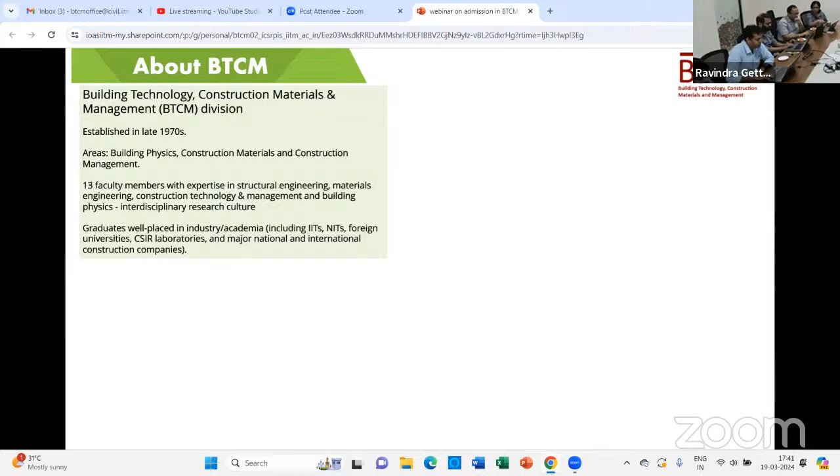At the moment, we have 13 faculty members in this group, and we all have diverse expertise corresponding to these areas. We've had several people graduate from the BTCM group across the years, and most of them are very well placed in industry and academia, both in India and abroad, many in the absolute best organizations, corporate or academic, in these fields.

So very quickly, we have, as I said, 13 faculty in the group, and this is a quick snapshot of the faculty as well as the areas that we work in. I'll start on the top right and quickly work our way down.

Professor Manu Santhanam and Professor Piyush Chaunsali work in the area of alternative cementitious materials. Professor Radhakrishna Pillai works in the area of corrosion control and service life extension. Professor Koshi Varghese works on lean construction. Professor Benny Raphael works on construction automation and robotics.

Ashwin Mahalingam, that's me, I work on building information modeling and integrated project delivery. Professor Murali Jagannathan works in the area of contracts. Professor Sivakumar Palaniappan works in the area of sustainable construction. Professor Nikhil Bugalia works in the area of digital technology simulation for sustainability. Professor Ravindra Gettu works in the area of life cycle assessment.

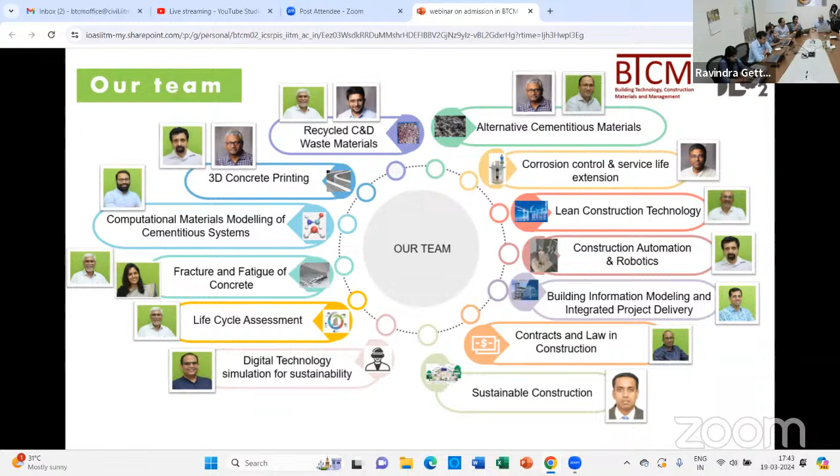So you can see we have a series of faculty who work in various areas relating to construction management, automation, process improvement, on construction materials, whether it's recycling, alternative cementitious materials, 3D printing, as well as in the area of building automation, construction automation.

In the BTCM group at IIT Madras, we have a dual degree program for our undergraduates who wish to stay an extra year and graduate with a master's. We have a regular MTech program where students enter through GATE and do a master's in building technology, construction materials, and management. We also have a user-oriented program where industries such as L&T sponsor students, about 30 a year. They have a mix of civil, electrical, mechanical backgrounds and spend 2 years doing a master's with a more practical focus combining technology and management. The projects at the end are more field focused.

But perhaps of more interest to this group are our two research programs: the Master of Science Research Program and the PhD Research Program. The way these programs work is there is an admission process through the admission portal. There will be an initial shortlisting followed by an interview, accompanied by a written test. Selected candidates will then be let into the PhD or master's program.

These programs will commence in June or July of this year. The interviews will happen in early May, results will be notified, and by June or July candidates will be enrolled. Typically the master's by research, the MS program, takes anywhere between 2 to 3 years. There are a few courses you take at the start, and then there is a research-based thesis that you develop. The PhD program typically takes about 4 to 5 years.

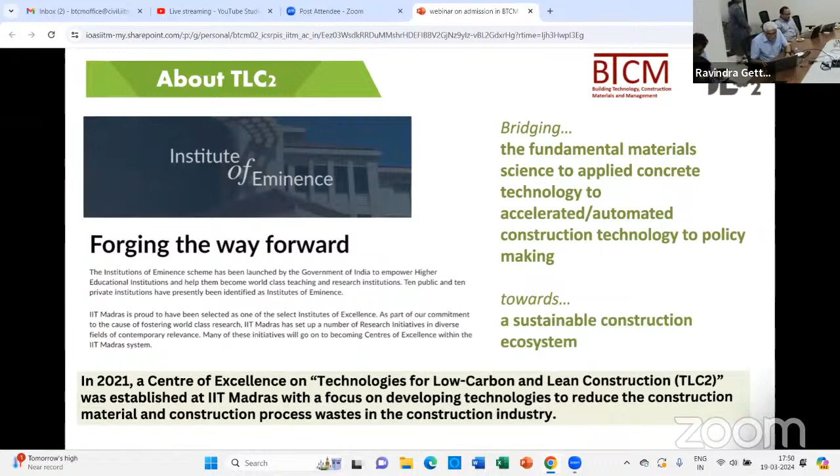So our focus is to reduce wastage and reduce carbon footprint. We want to recycle and reuse material waste, not only waste coming from our sector—we would like to use advantageously waste coming from other sectors as well. For example, fly ash or slag from other sectors are used beneficially in construction. We want to minimize process waste—any wastage coming from the construction process we want to reduce. That is what we believe will lead to the sustainable way of construction.

So we start off with materials. Say if you have a waste material, we want to choose and find out which is the right material to use, design the mechanical properties, and find advantages for using it in structural concrete or any other concrete or construction application. We design not only for mechanical properties but also durability and sustainability. Durability is something you will hear about from the people talking after me—we believe it has to be an essential part of sustainability. Sustainability cannot be without durability. As far as our construction sector goes, sustainability is not only environmental impact but also social and economical impact that we want to consider.

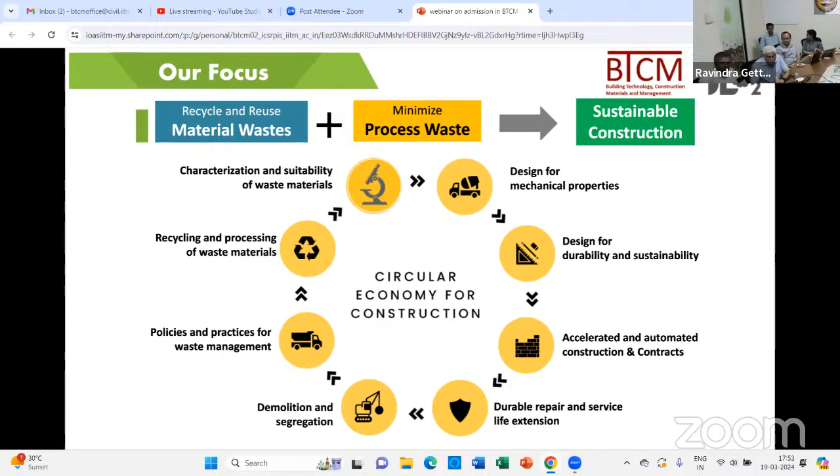Okay, so I'll pass the stage to Professor Radhakrishna Pillai, who will talk on the current research topics he is interested in, and then other faculty members will also speak. This will give you an idea of the areas we are looking at and which professors are looking for students, so you can reach out to them regarding BTCM and TLC2.

Hi, this is Radhakrishna Pillai. I'm looking for students to work on two research projects. One is looking at how we can control corrosion in concrete structures for the long term. We have a lot of structures now experiencing corrosion, and we want to do something to stop corrosion for the next 50 years. We're looking at using galvanic cathodic protection technology, trying to develop a new type of anode specifically designed for extending the life of concrete structures by another 50 years. It's a challenging project—we're looking at cement chemistry and electrochemistry, all put together.

Another project is to look at how to design concrete structures for service life, but not at the element-level durability design—rather at the structural-level durability design. So these are the two projects I am interested in right now. Next is...

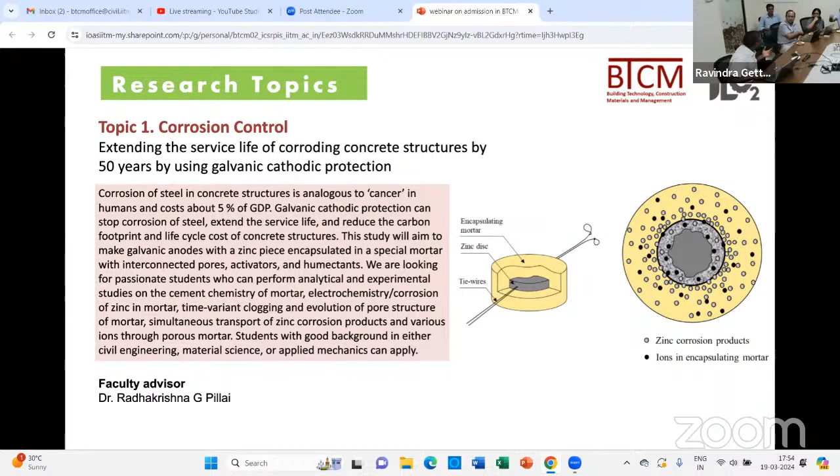Hello everyone, thanks for joining. I'm Piyush Chaunsali. My primary research area is in the field of low CO2 cements, specifically durability studies on lab-synthesized calcium sulfoaluminate cements. We had success synthesizing this low CO2 cement in the lab, but at a very small scale. Now, since we have a rotary kiln—first of its kind in India—we would like to scale up manufacturing of the CSA cement using locally available materials.

I would expect someone to manufacture this cement at large scale using locally available materials, and look at the durability of the concrete made using this CSAB cement. Please feel free to refer to published papers in this area.

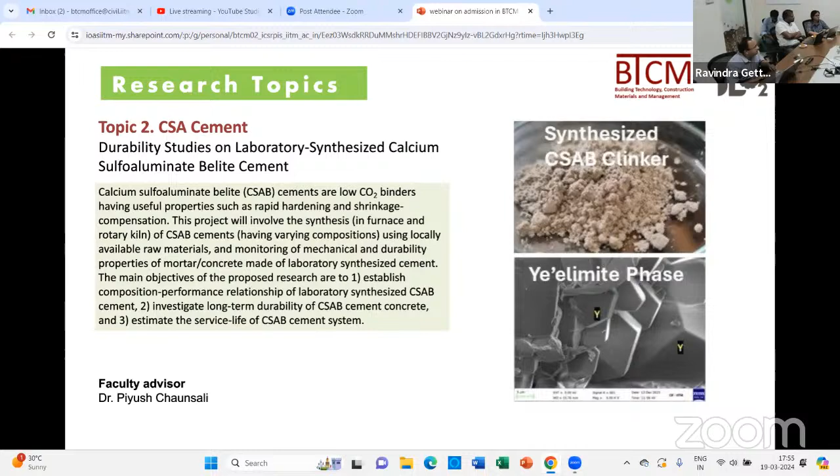Our colleague Dr. Nikhil Bugalia is currently attending a conference in the United States, but I wanted to briefly introduce a project that he is very interested in working on. Today there's a lot of technology being employed in the construction process, and one of the cutting-edge tools we're now using in construction is virtual reality and augmented reality techniques.

The idea is, if you want to train people to work safely, it becomes very difficult to train them on construction sites, because on construction sites you are already facing safety hazards. You can train them theoretically in a classroom, but that's just theoretical knowledge. But if you can use virtual reality to give workers an immersive experience on the construction site, it's quite possible they will learn good safety practices, so that when they get onto construction sites they actually work in a safe manner, and the safety performance on all our projects improves.

So this is an area of research where Professor Bugalia is interested in looking at students who can help not only build virtual reality-based models of construction, but also conduct research on how we would train workers in these virtual reality environments in order to make them safer when they get onto construction sites.

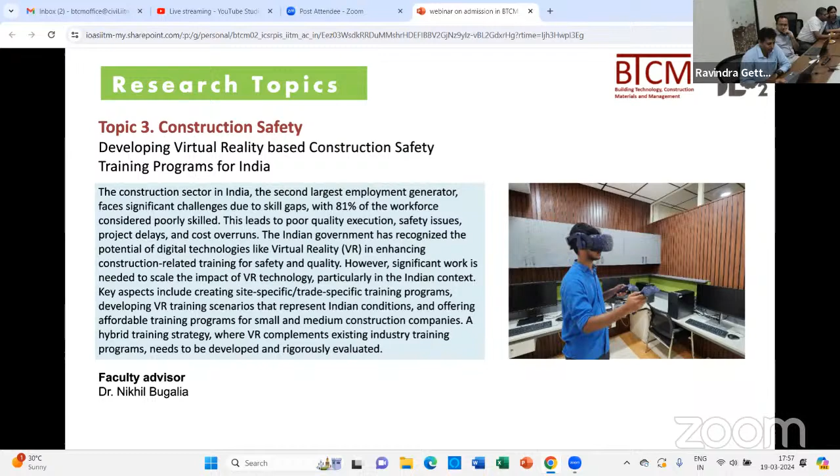Hi all, and thank you very much for joining us today. My name is Murali Jagannathan, and my area of interest is in construction contracts, legal issues, and dispute resolution. So I have two topics to offer.

The first one is on opportunistic behavior and construction disputes. If you look at any construction dispute resolution process, there are a lot of things that get into this process which ultimately can be successful or may not be successful. Now, of many things that get into the process of dispute resolution, when there is opportunistic behavior by any party involved, not this party or that party, any party involved in the process, the time that takes for dispute resolution increases dramatically.

Ultimately, you're going to settle at some particular number which you have in mind, but you start off with a larger number, or start off with an unreasonable kind of proposal. So that's where time is consumed to resolve the disputes.

Now, having said that, a certain degree of opportunism is definitely inherent in this process. We cannot avoid it, ultimately human beings are involved here. So where is that thin line? Is there any way through which we can measure this opportunistic behavior and try to come up with some kind of solution or metric for this? And what would be the factors involved when we talk about opportunistic behavior of the parties, and why does it happen?

So it involves a lot of work, both in terms of qualitative understanding of the problem, and also quantitative research, quantitative approaches to arrive at a solution. So those who are interested in this area of dispute resolution, contractual claims, and management, this is something you can look out for.

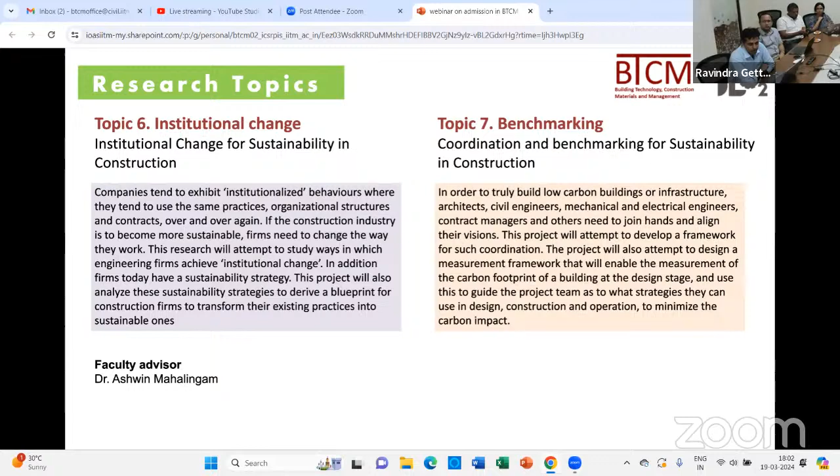I work mostly on very fundamental aspects, mainly looking at how cement hydration happens at the molecular level, at the atom scale. So the research topics that I do are mainly based on techniques like molecular dynamics and density functional theory calculations, where the idea is to understand cement hydration. The main product of cement hydration is calcium silicate hydrate. We know this is the most manufactured nanomaterial in the world.

We know how its atomic structure is in the final form that gives the concrete its strength and so on. So in this research topic, I would like to see how, when cement is mixed with water, the different atoms will behave in the solution, and then how these ions will come together, form clusters, and eventually nucleate and form the final CSH structure.

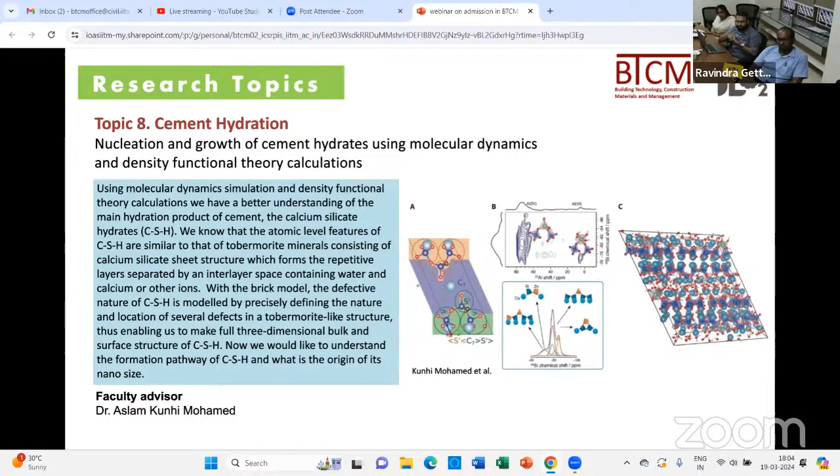So this would involve some basic understanding of chemistry, physics, as well as if you have some background in material science, that will also be useful. So if you have any questions on this, please let me know or post it on the chat. Thank you. So now I will give it to my colleague, Professor Keerthana.

Hi everyone, I'm Keerthana Kirupakaran. So I work on the area of mechanical behavior of construction materials. Like my colleagues previously who were working on materials, they're looking into developing different types of materials.

And in order to actually get into the structures, we have to know the mechanical behavior of these materials which have been developed. So I mainly look at how do we understand the mechanical behavior, how do we understand its structure behavior, and so on.

So here what is happening is, as the machine is moving forward, the jack thrust, the jacks from the tunnel boring machine are using the rear end precast segments as a reaction, and they are moving forward. So when this reaction is forced upon these segments, a lot of cracks occur. These cracks are mainly happening due to splitting, and these are called splitting and spalling fracture.

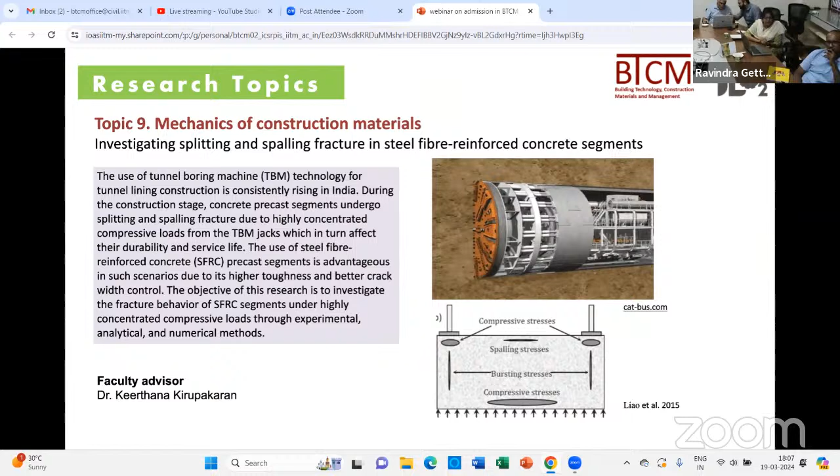If you wondered why concrete cracks, you should probably take up this project. You find cracks in concrete everywhere, but sometimes cracks happen even in compression when they should not be cracking in compression.

Where you have compression and tension leading to cracking. With this, we believe we can understand cracking that can occur under compressive stress, splitting, spalling, and so on, like in that segmented tunnel lining that Professor Keerthana talked about, bearing in bridge piers, diagonal shear of beams. So many cases we have cracking like this.

This means that the student would have to go to the lab and do some tests. I always have fun breaking stuff. So we need students who want to break things and then analyze why these materials break.

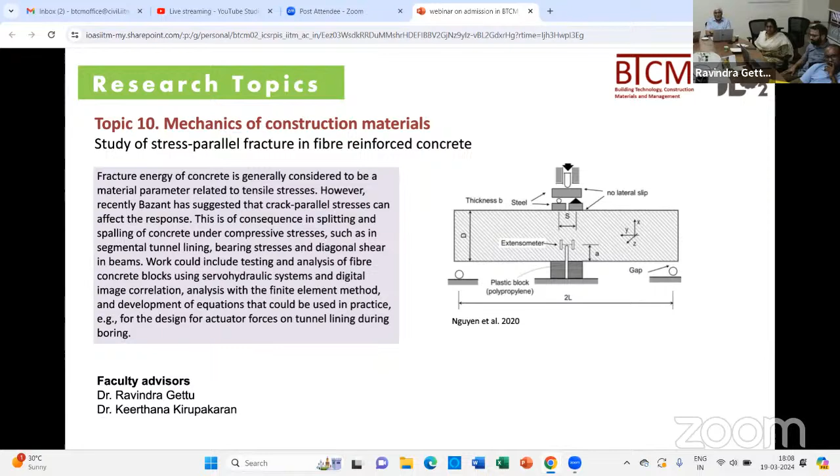We want to particularly look at fiber reinforced concrete, which is again a novel material where you put the reinforcement along with the concrete. And we want to use fun techniques like digital image correlation and finite element methods so that we can understand how cracking occurs under these stresses and how we can go to application.

The next topic is also something that I would like to be involved with, with Professor Radhakrishna Pillai, where we are looking at a framework for assessing sustainability in concrete structures.

In a concrete structure, there are infinite possible design mixes that you can use, infinite possible ways of designing elements, beams, columns, and so on. So we want to know if we can put together a framework which will help us compare not only different materials, but different structural systems, and see if one is more sustainable than the other.

So this would mean that we would help the usage of waste materials, low carbon cement, and reduction of ordinary Portland clinker in the concrete.

Not only that, but we will also look at durability and service life extension. As I mentioned before, durability is very important for sustainability. Something that has a very low carbon footprint and just lasts a few years is not something we want. We want something to last for a long time.

This is something that we want to incorporate in our methodology. And we feel that if we do it right, we can construct structures with reduced material usage, with longer durability, without affecting the structural requirements.

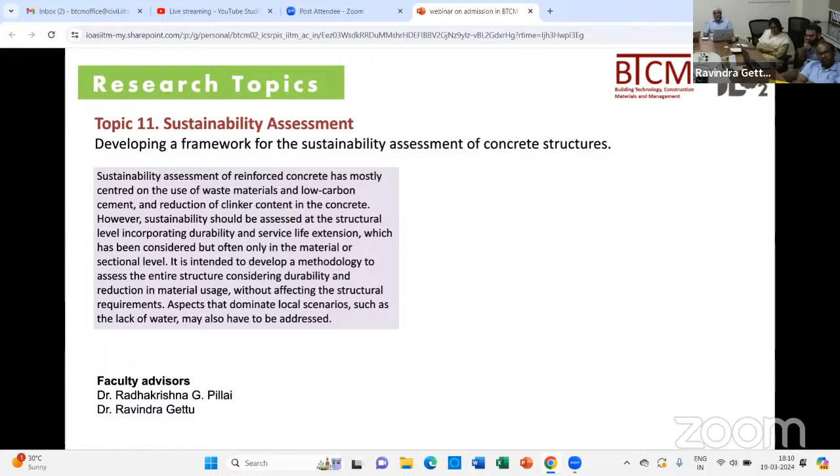So those are some of the topics that we are all working on. Our suggestion is that if you are interested in a master's by research or a PhD in the BTCM group, think about the topics that we've mentioned and see if you'd like to align yourselves with any of these topics.

It would be to your advantage if you could do a little bit of preparation to understand what the topic is, and perhaps come with some kind of an outline or a plan of action of what you might do to tackle this topic. But at the same time, we are not closed completely to other ideas as well.

So if you have an idea that you're very passionate about and you feel that it fits with some of the interests that you've heard today, then absolutely, go for it. But do come prepared to the interview with an idea that you want to work on, either one that you've heard today or something else, with some background work done on a broad outline of what you would like to do.